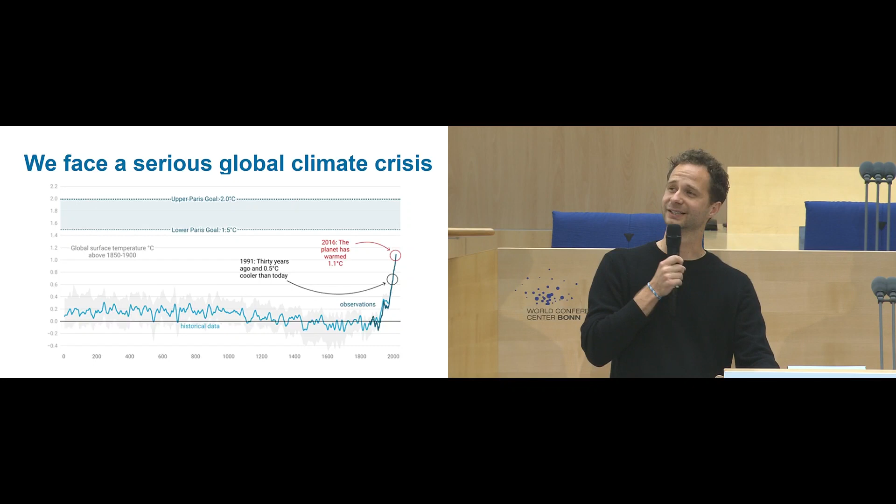So a picture from Spain on a hot day. Also in the Netherlands our perspectives change, because as you can see on the map, a part of the Netherlands is white because it got so hot that the normal rating system couldn't handle it anymore. So we're really in new times and we have to find new ways to design the city.

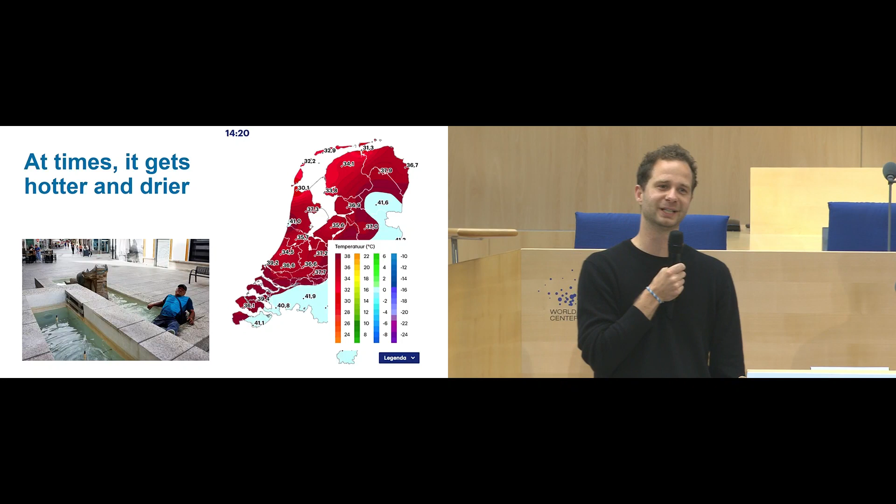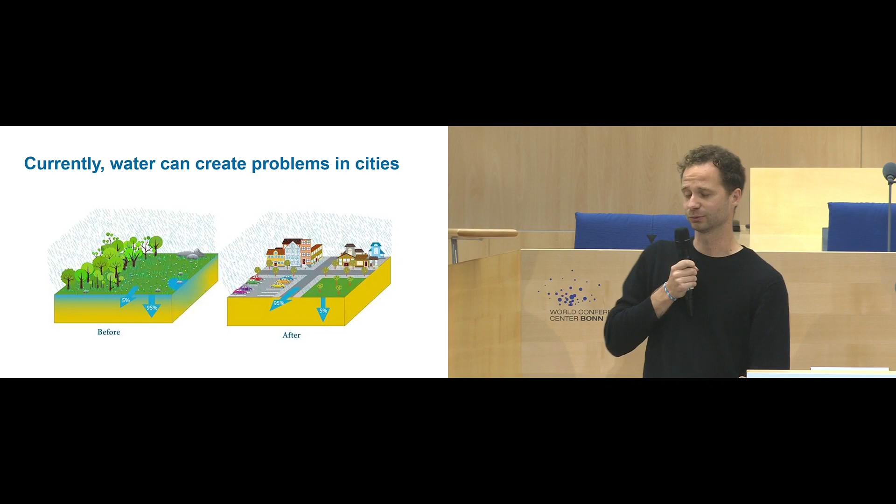Currently, especially in the cities we work in, water is a problem because there are a lot of hard, impermeable surfaces. So water runs through the city a lot, but the city doesn't really absorb the water, and because of that we have to deal with a lot of risks.

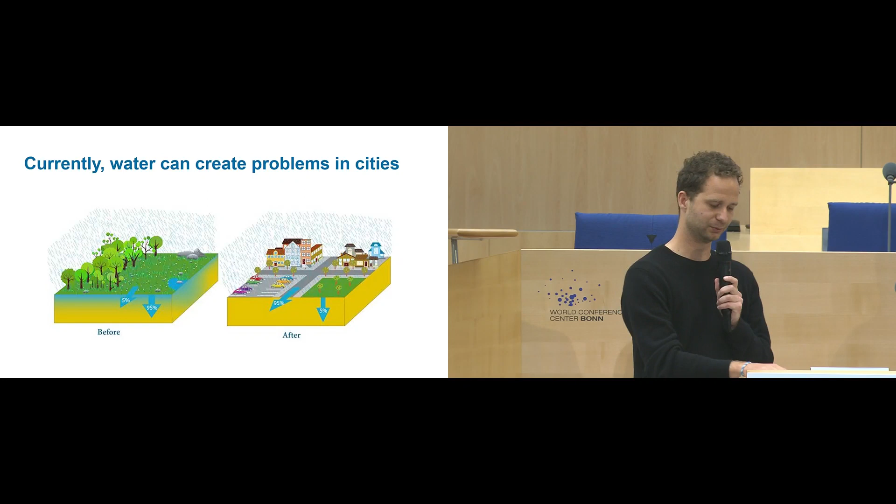So we already work together with water professionals who teach us about where the risks of flooding are. This is a project I did in another city in the Netherlands, where you can see that due to heavy rainfall, places start to get flooded. We analyze this and we can use it because we can create more spaces in our designs for water and for green, so it helps.

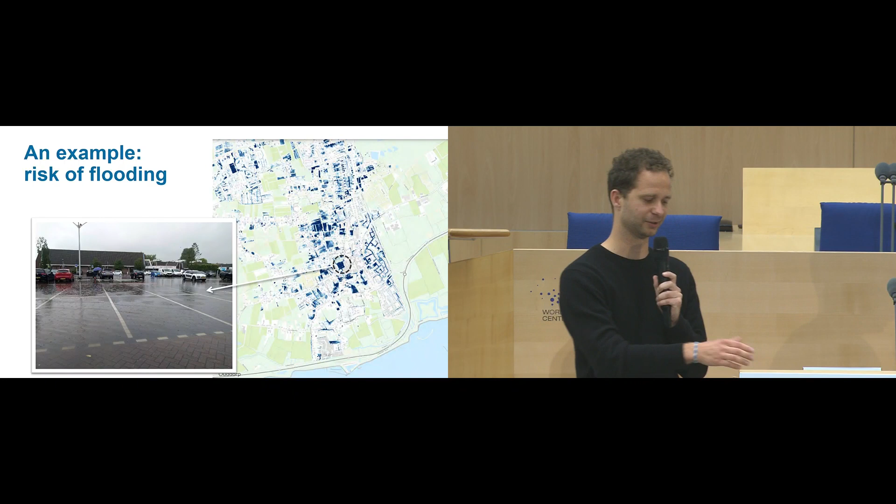But for now we see that at the same place, they knew this problem was happening, but they created another parking space, almost the same, and they just found a technical solution for it. So they thought, well, let's make the water run away quicker.

This is definitely a solution, but I think it shows how we as designers and water engineers don't always work together, because if we had involved each other or known more, maybe we would have gotten more green space as well. This is a big problem we as designers have, and you as water engineers have - we're probably used to seeing things in our own cubicle a little bit.

So I will take you through a little bit of the solutions we are working on. It's really an urban design perspective, not like the technical solutions we also hear a lot about, which is really nice as well. It focuses on the Netherlands and the temperate climate, because we are not working in Africa for example, but I hope the next speakers will address this a little more.

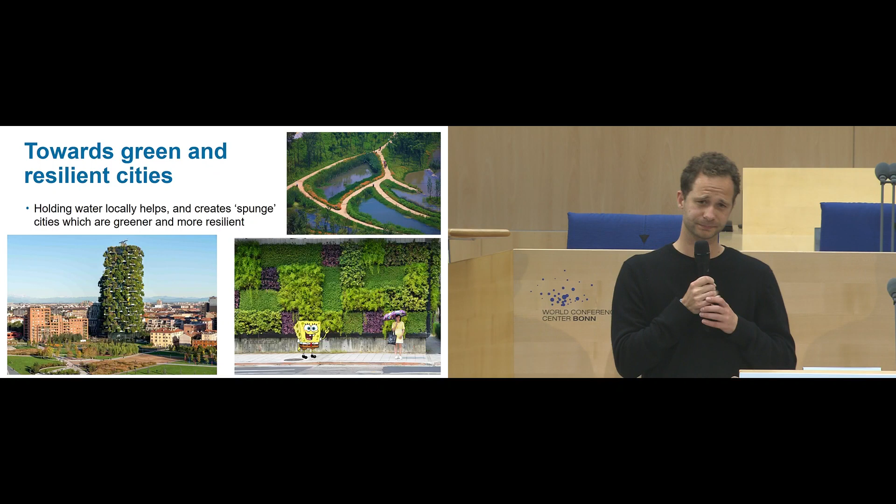So, towards green and resilient cities. When we look at the city, we really want to make sure it becomes more of a sponge city. So instead of creating all these hard surfaces, we want to absorb the water into the city, because it helps the city become more green and makes it much more resilient, and at the same time it gets more attractive as well.

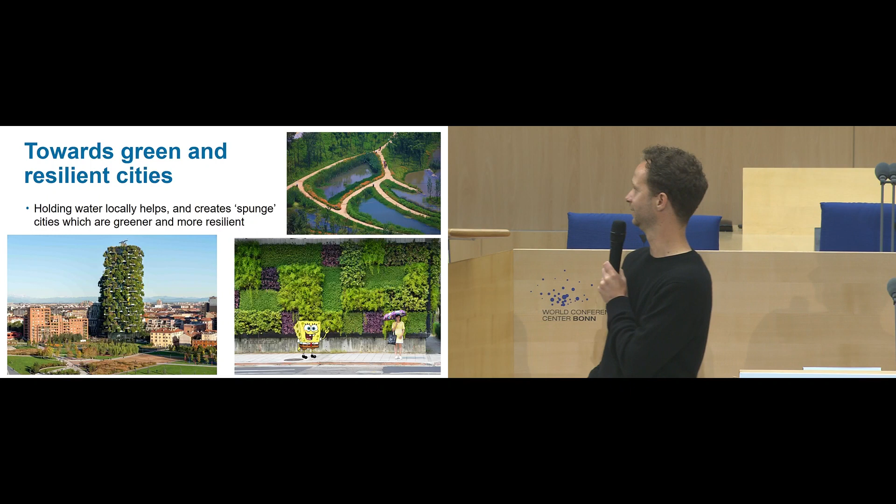So you can see a tower - we all know a lot of big towers in our own cities, but with all the green it immediately gets more attractive. Also green walls and a place for water really make the city more resilient and at the same time more attractive.

In our work, we really try to go from this gray infrastructure, these hard cities, to more soft cities, where also facades of buildings can be green and absorb water as well, which may help urban water managers address their problems, because water can be held more locally instead of flowing away in sewage. It also means providing a little less space for the car and hardened surfaces, but more for green and trees, which also help provide shade during the hotter days.

These kind of pictures are showing that it's really as much an attractive city as it's a more resilient city when you think about this green and blue infrastructure. Water can really help create better urban spaces.

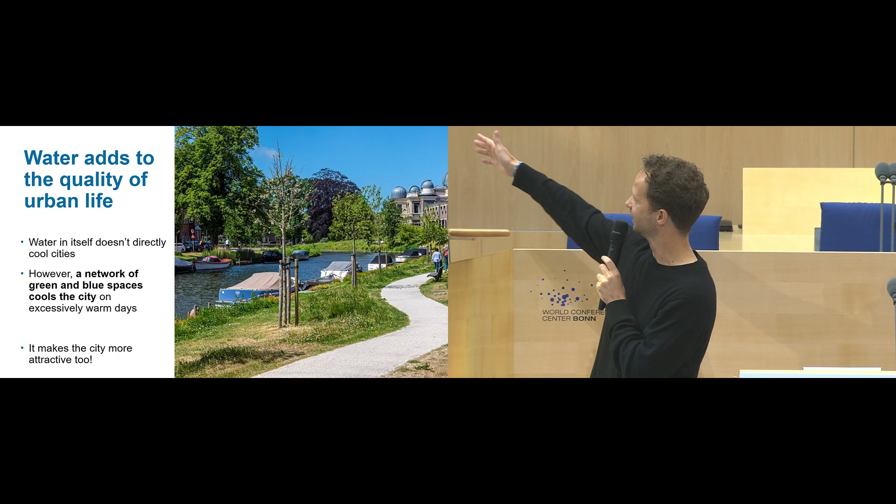As urban designers, we really try to focus on the existing green and blue networks and take them as a starting point for our design instead of just designing over them and starting over. It makes the city more attractive too, as you can just run or walk next to the water, or like in Paris, where people are bicycling next to the Seine. These kind of things are really a lot of positives to the city.

Apart from water and green, water can just be fun in itself. So as designers, we also like to play with water in the city because it can be fun. It can help kids enjoy their space in the city who don't have a garden for themselves, for example. And sometimes we need to find solutions also during heavier rain, but you can design them in a nice way as well.

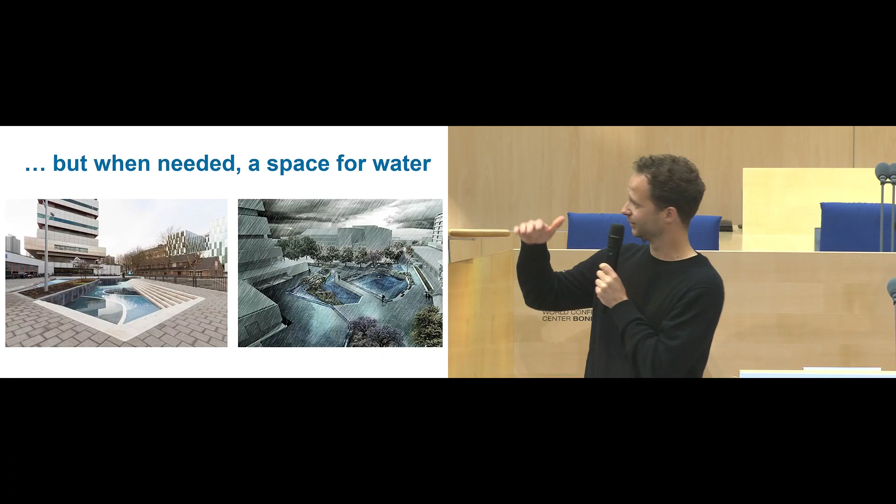So here you have a space - people love hanging out here. It's in Rotterdam, close to a university, so it's a real social space. But when it's needed, it's a reservoir for rainwater. It can fill all the way to the top, and it helps the city hold water and also helps the green places around this square to have their water.

So it's not only about finding technical solutions, but about talking together and seeing what the problem is, how we can solve it, and how we can design it together with the information we have to have a positive impact on the inhabitants. So in summary, water is crucial for building climate resilient cities.

We see this in our practice every day, and in a rapidly urbanizing world, cities are now sometimes part of the problem because of all the hardened surfaces and lack of green. But they can really be part of the solution when we try to build more towards green sponge cities, which absorb water locally, hold it, and make sure the city is cooler. The inhabitants are happier because they have a lot of green around, and it invites movement, so it's also a healthier city.

For that, teamwork is really needed. We need to talk together with each other. We have to make sure we are aware of the problems from water, and understand how the water flows, but also talk to academia who can find new solutions, and eventually the community. We try to make places for the people who live there, so we need to involve them as well, and then we can create more added value together instead of just solving problems separately.

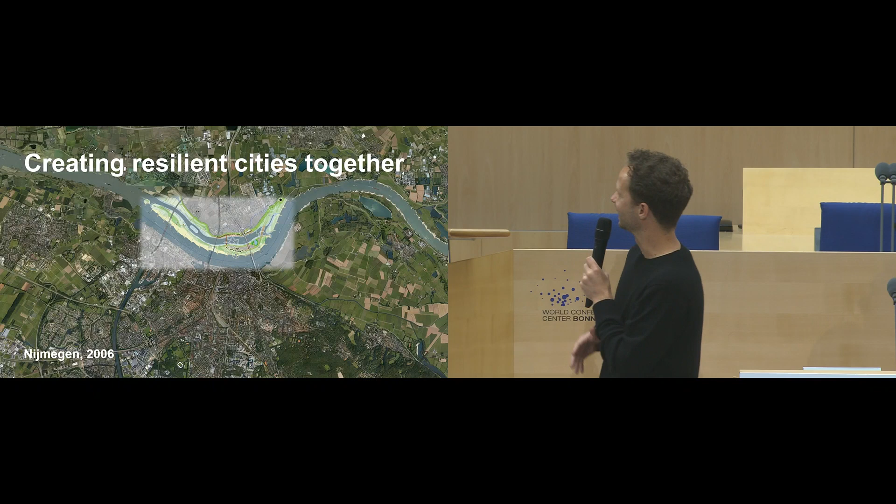They had to come up with a solution, and instead of just broadening the river or finding a solution so the river could handle more water, they started designing and talking to the communities as well, trying to solve it together. They came up with an idea to make a little extra river - we call it a mirror river in Nijmegen. It's an extra river to handle the flow of water during heavy rainfall.

But it also creates an island in the city, and on this island we designed a new place in the city. It's a green place, and people could talk together with the designers about what it should be.

Now we're in a situation where it's finished for a few years, and it shows it's really contributed a lot to the city. It made a greener city, a happier city, and a more resilient city, because it's also fine on heavy rainfall days when it overflows. It's designed that way, so it's fine that the paths overflow as well - they can handle that.

But when it's not overflowing, it's really a place where all the inhabitants of Nijmegen love it. It's become one of the most favorite places in the city. It's just a more fun city, and together with the technical solutions, the urban design solutions, and the local community, they really addressed the problem in a way that added way more value than we could have imagined before. Thank you, that's what I had to say.

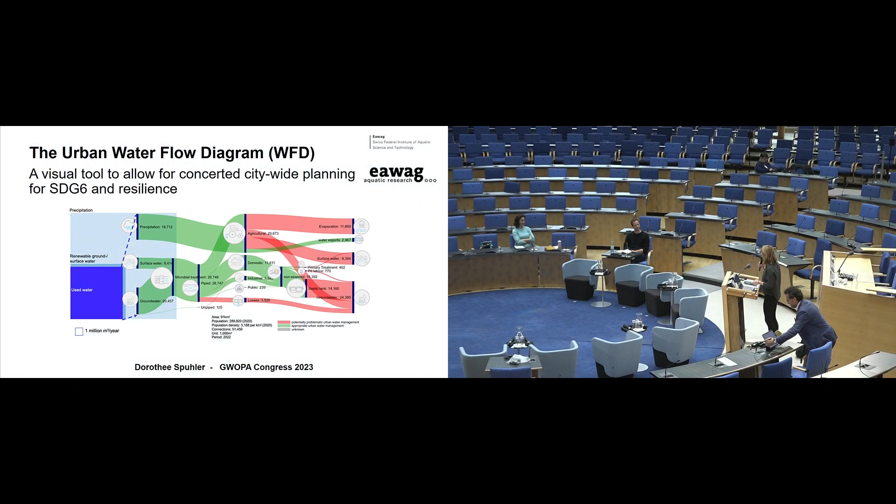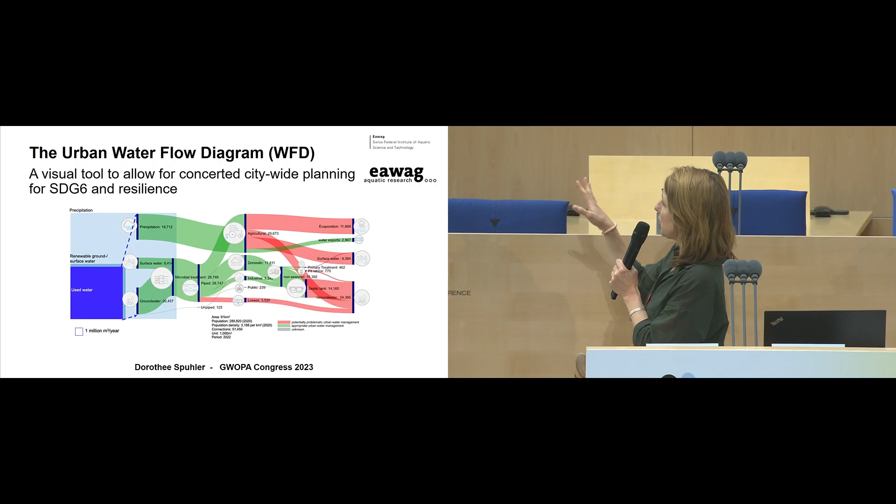Hello, thanks. Dorothee Spuhler. That's my presentation up there. I'm going to present the urban water flow diagram, a visual tool to allow for concerted citywide planning for SDG 6 and enhanced resilience. A big title, but before that, I would like to connect to the previous presenter, and I brought this picture here.

It's a little bit small, I know. I don't know if you can recognize what it is, but it's actually the Swiss dashboard for measuring corona in wastewater. Nothing to do with the water flow diagram, but I brought this picture because in Switzerland the story behind it is interesting. Like many other places, we ran into the pandemic with very little knowledge and a lot of directives from the government which were not well accepted because they were not well founded and not understood.

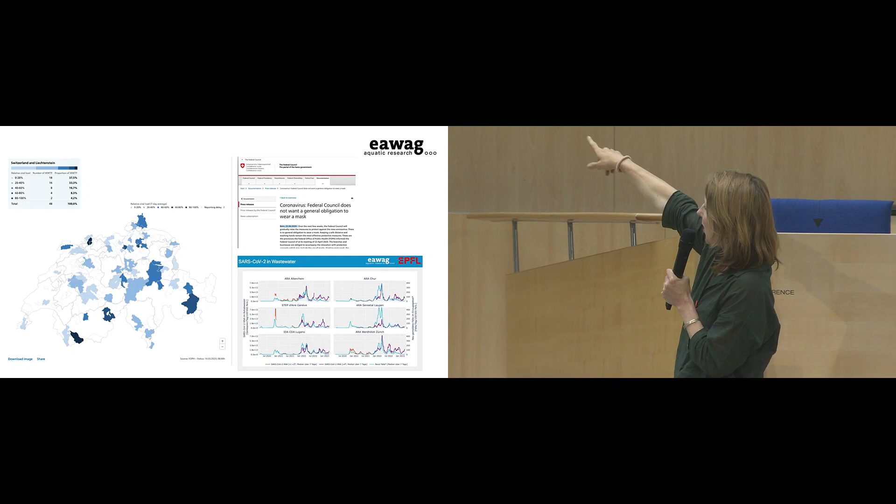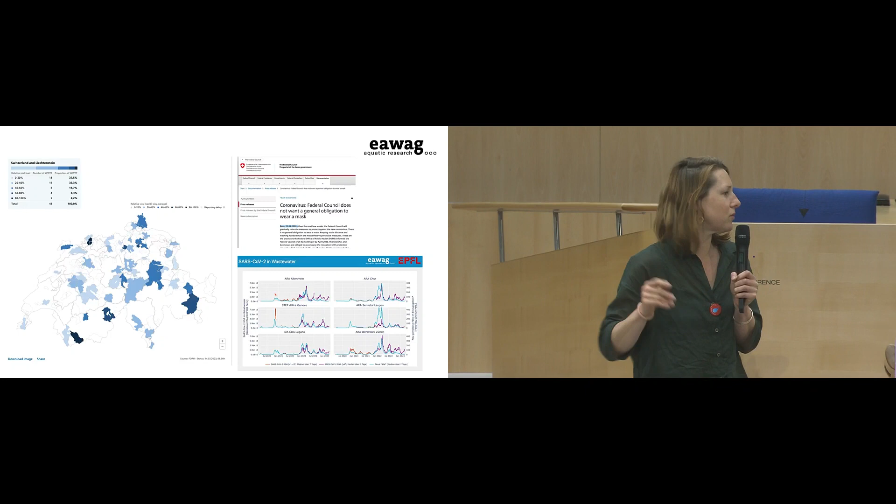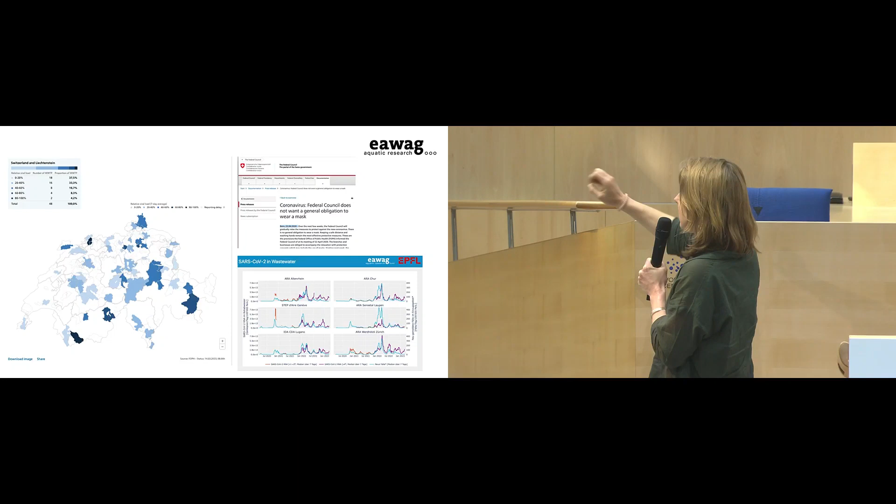And then later on, that's the Switzerland case on the left, and on the top right you have a headline where the Federal Council actually does not want a general obligation of masks. That's a typical example, because they said masks won't help and so on. But later on the private sector came in and measurement techniques and vaccines were developed, and nowadays we have this fully fledged online monitoring system in wastewater treatment plants.

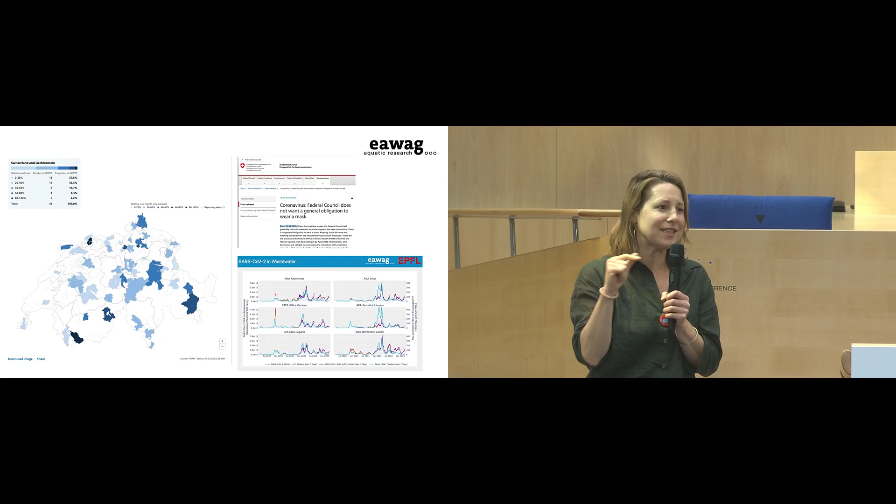I brought that example because I think it's a perfect example of teamwork. My colleagues at EAWAG developed that, but together with policymakers, the private sector, and civil society who at the end have to understand it. This teamwork example is actually the kind of thing we also try to enable with the water flow diagram.

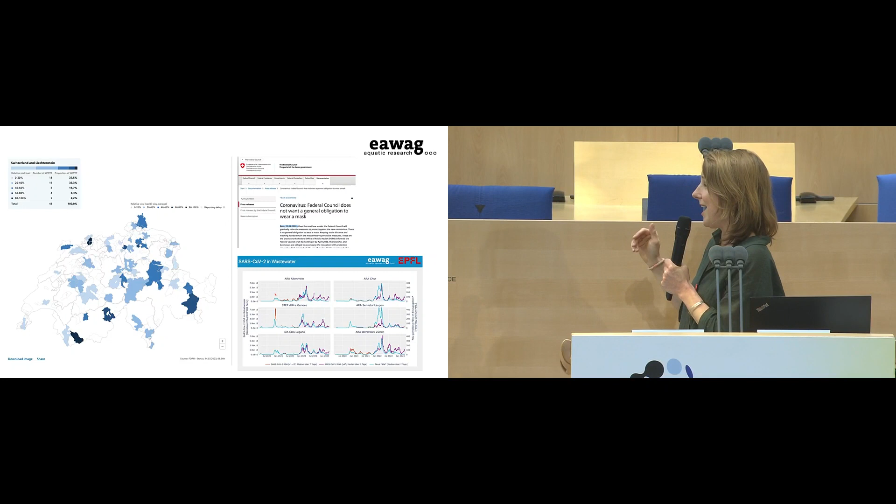So I'm a little bit the freak here. I'm an academic person, like you're a private sector person. It's the freak show, I don't know.

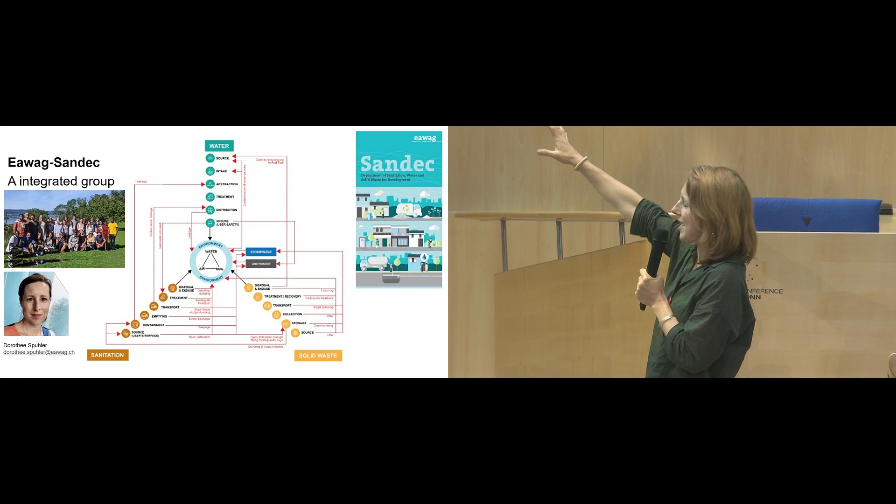Anyway, I'm from EAWAG, the Swiss Federal Institute of Aquatic Science and Technology, which has 12 departments, many disciplines, but all around water. I'm in one department called Sanitation, Solid Waste and Water. We are the only department that has an integrated approach, because we believe we have to look at sanitation, solid waste and water in an integrated way to use opportunities and jointly manage challenges.

So we're coming from an integrated approach, and we also work very transdisciplinary. We want to really engage in close collaboration with practice, policy, and civil society.

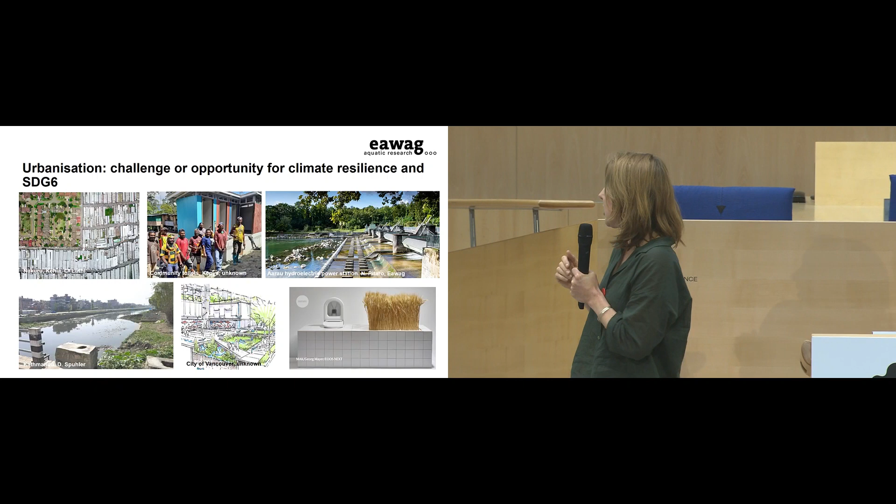In Switzerland, we have the chance... we also focus on urban areas, and urban areas bring a lot of challenges but also opportunities when it comes to SDG 6, many of which have already been mentioned yesterday evening by Carla, and now again by you. Challenges include pollution, inequalities, heavy rainfalls, floods. Opportunities include non-potable reuse of water, sponge cities, and so on.

In Switzerland, we have the chance to have a very active community of practice, where people from academia, science, policy, and practice all come together and regularly have an exchange. And for these people, this integrated approach is also relevant.

It was in a meeting in 2020 where we sat together and asked ourselves, well, can we develop a tool that enables different actors at the local level in our development cooperation projects to work closer together and have an integrated view at the city level, linking IWRM, the human right to water, sanitation, and so on. That was the initiation of the idea of this water flow diagram.

The idea was to have a tool that allows us to describe everything happening around water, to have an understanding between different actors and sectors, and then to jointly prioritize action. That was the idea behind it.

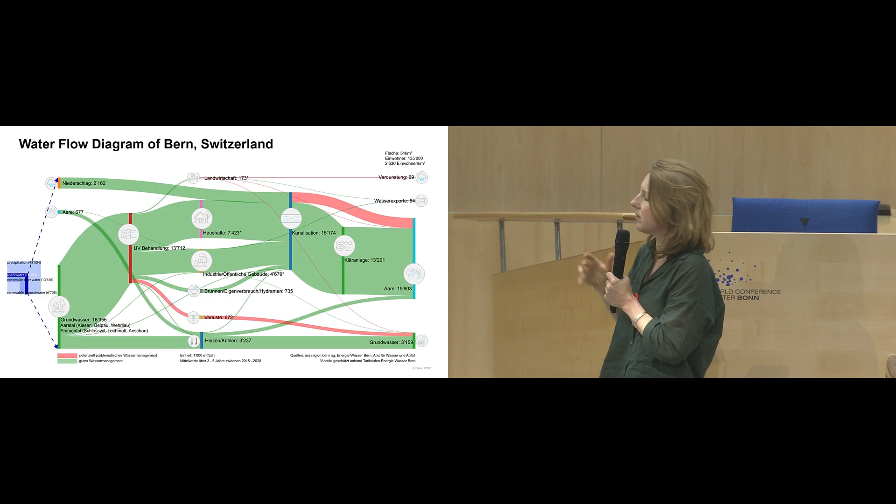The result is the water flow diagram, and here is our first case study. This is the city of Bern, capital of Switzerland. The water flow diagram has on the left hand these boxes - that's all the available water. Then you have a Sankey diagram which shows all the different sources, uses, treatment, uses, collection, and at the end, reuse or disposal.

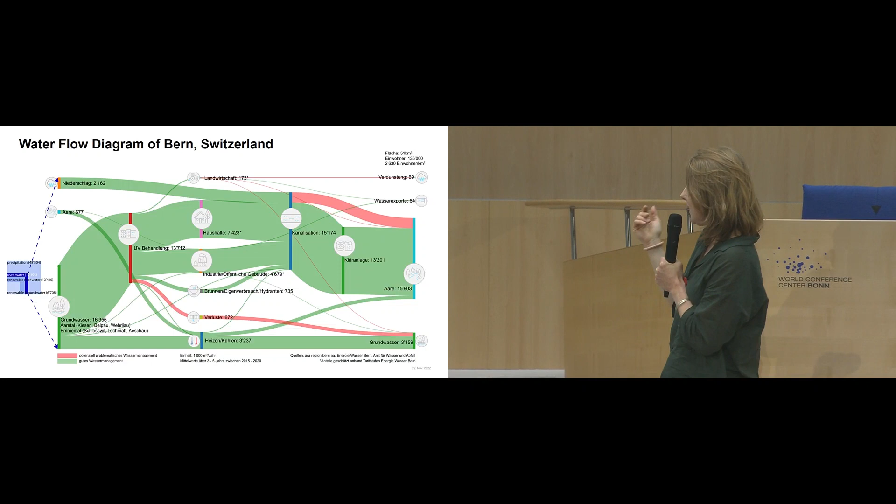What you see here also allows you to give a judgment on whether something is appropriate management or problematic management. In this water flow diagram for Switzerland, you would say everything should be green, we're fine, but there are two things that are interesting. First, the groundwater - that's the big box on the left - is actually imported from outside the city, and at the end goes back to the river.

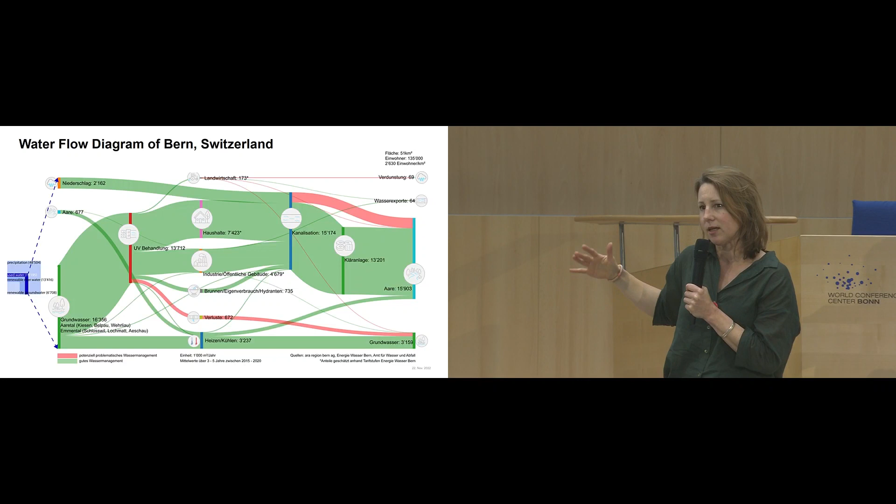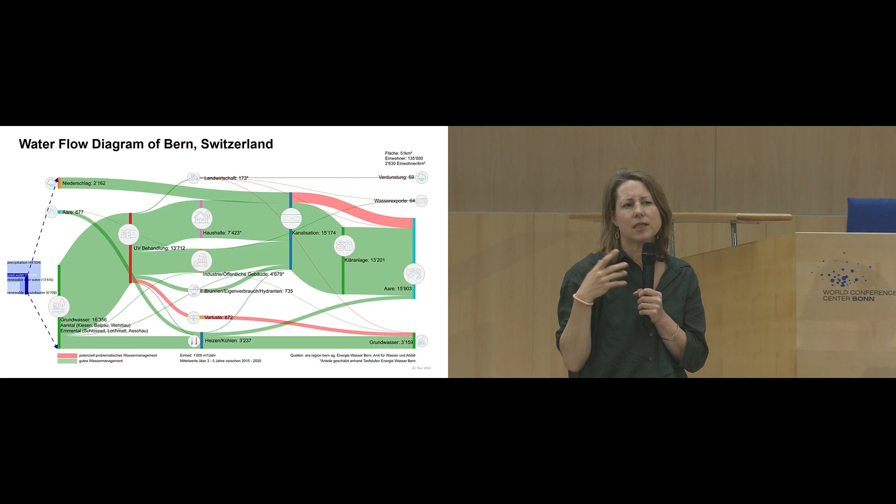So it's kind of a displacement of the water, and downstream there are many more cities, and the flooding risk is quite high there. The other problem is the red line up there in Bern - the combined sewer overflow. That's water that goes into the river untreated because of heavy rainfall. It's much higher than in general in Switzerland, about 8%. So what is next?

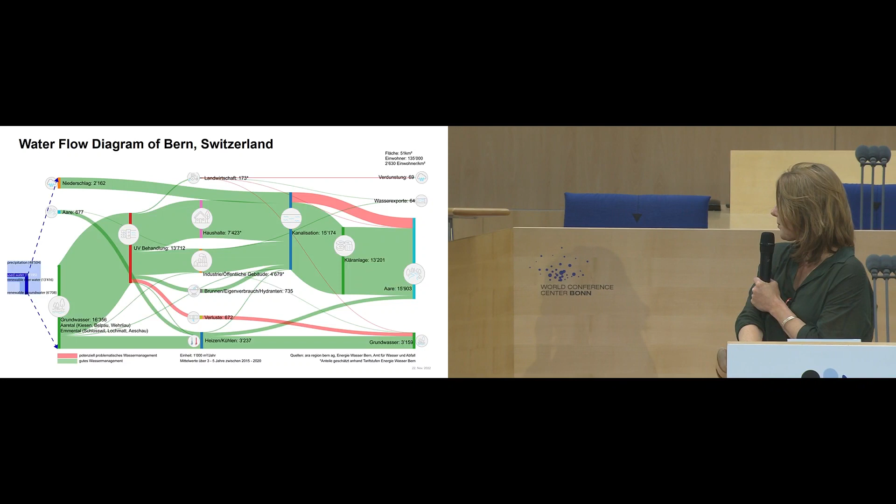Why did the city of Bern develop that with us? The city of Bern is actually a Blue Community. Blue Communities is a movement from Canada that has rolled out globally, and it's quite a vibrant community in Switzerland. The Blue Community is a self-declaration of a city or institution promoting water as a human right, supporting or investing in tap water instead of bottled water, and promoting water and sanitation as a public good.

I won't go into detail, but what's important is that in Bern we had a lot of data already. Still, it was a really rewarding activity for the city, because it was the first time that wastewater, water, and the different services put the data together in one picture, and they realized it's much easier to talk to political people and the general public with it. It triggered the city of Bern to start investing in blue-green infrastructure to address combined sewer overflow, and they continue to use this water flow diagram for annual reporting.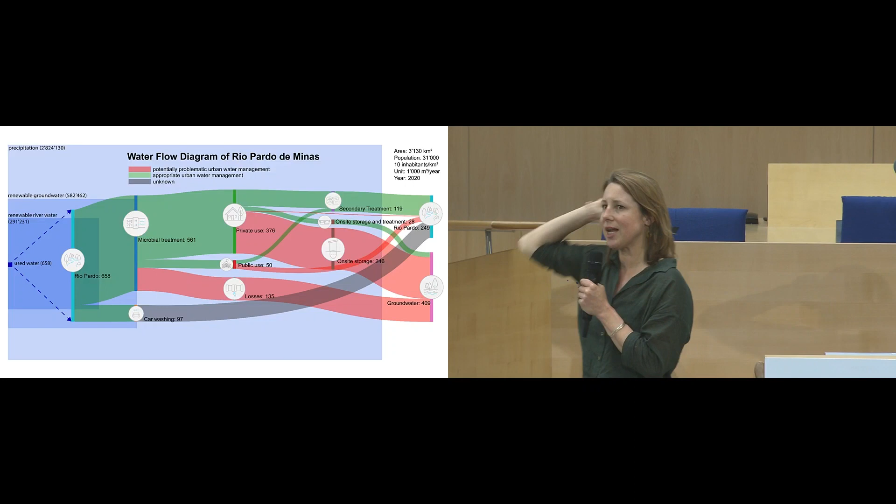In Rio Pardo de Minas, we had very little data. So we started with the first diagram only using assumptions, then held workshops where different actors came in. At the end, we ended up not only with this diagram for the city center, but realized that agroforestry and mining companies have an important stake in the whole water situation. Now we have another diagram which looks very different, showing a huge risk of overexploitation. This is only the data based on water rights, so even though the rights would be respected, there's a risk of water overuse in the future.

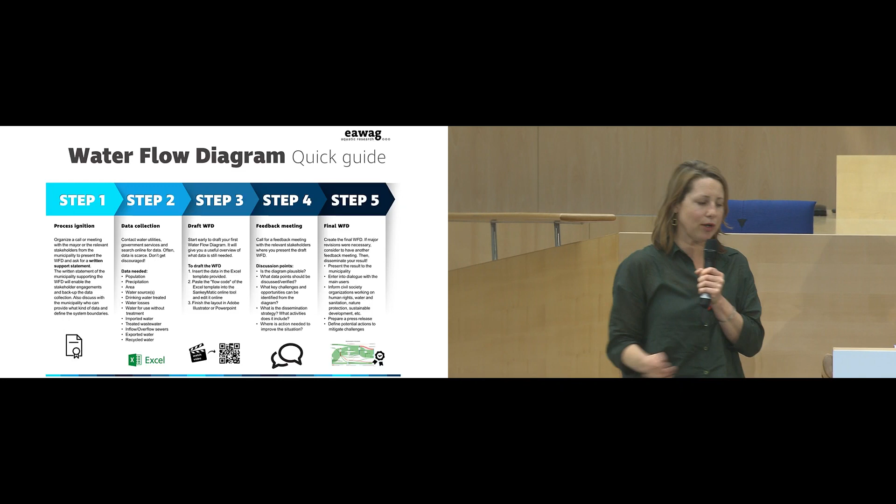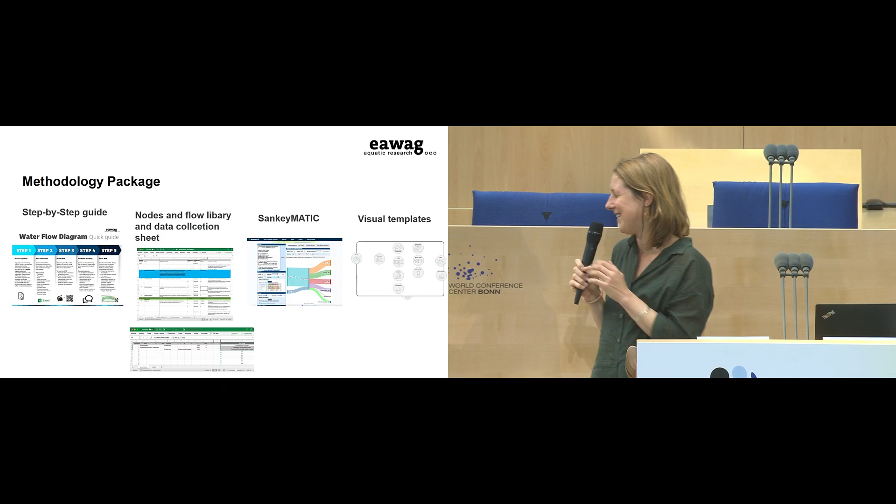So the process is important. It's not only about the diagram, but also the embedding in a participatory process, as we've seen in Brazil. To support this process, we developed a quick guide, available online, along with a few other resources. With that, within half a day, you can make some basic estimations. I'll try to talk fast to be in time. Make a first diagram and then start to discuss it with your stakeholders.

At the end, we developed a tool that intuitively and very compactly allows a city, utility, or organization to show different opportunities and challenges related to the SDGs, including inequalities or access to sanitation and water, pollution, reuse, and stakeholder collaboration. We developed that in 2020, which is when I started in this community of practice.

We presented the first case studies in Stockholm in 2021. We then went to Dakar with a standardized methodology. And now we have this methodology online, it's free, and we support cities around the world to apply this tool in their future projects. That's also a little bit why I'm here.

In Switzerland, we started to promote it as part of city partnerships, not only Blue Community partnerships like Bern and Rio Pardo, but also city-to-city partnerships. We have two of them, presented yesterday: Lausanne-Nouakchott and Lugano-Hawassa. Within these partnerships, we believe this visual representation can enrich them and support the exchange. With this, I would encourage different organizations to use it and join us to help further develop this tool.

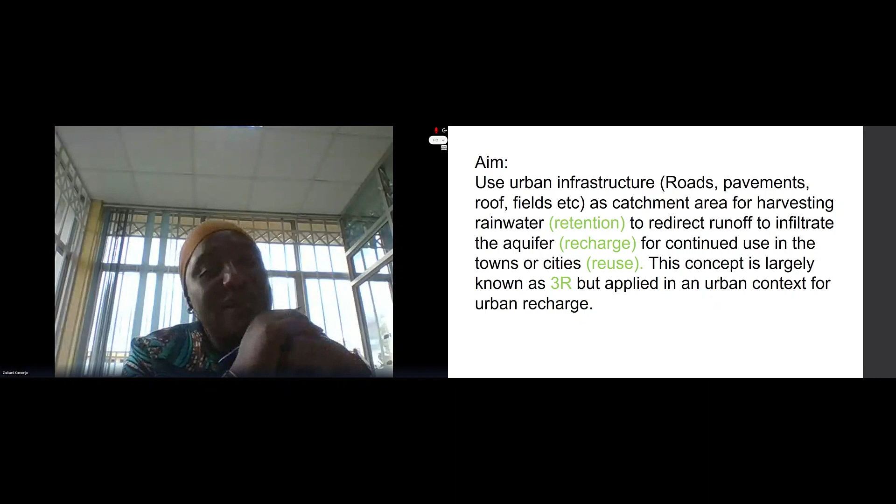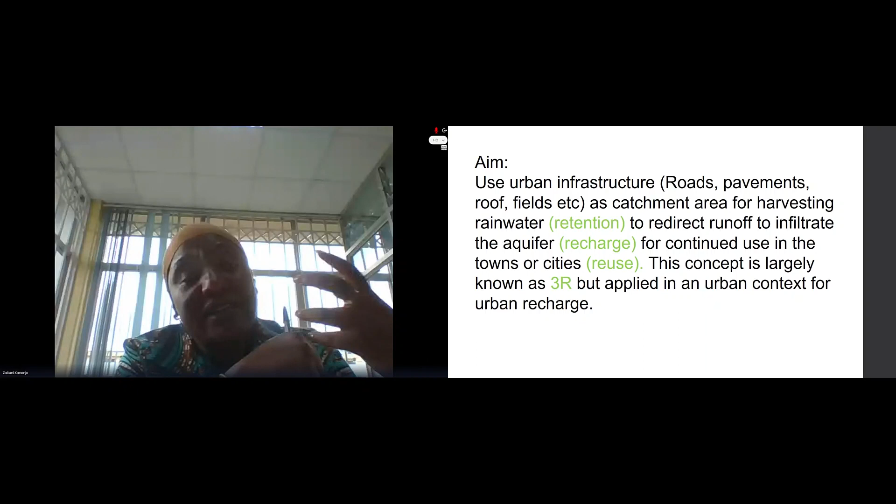Our aim is to use the urban infrastructure, that is the roads, pavements, roofs, and fields, as a catchment area for harvesting water, so that we are able to retain the water and redirect runoff to infiltrate the aquifer, for recharge and continued use in the city. This concept is largely based on the 3 Rs, because as a city our population is really growing while our production is really low, meaning we are not able to serve almost half of the population of the city.

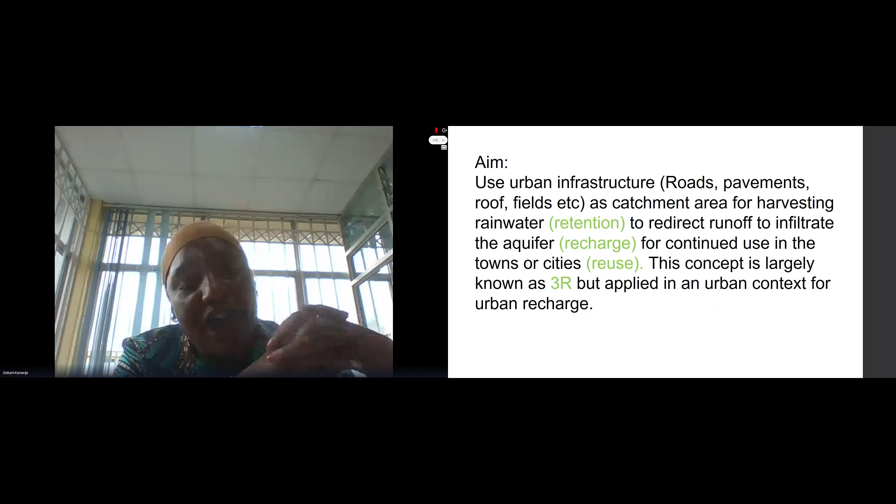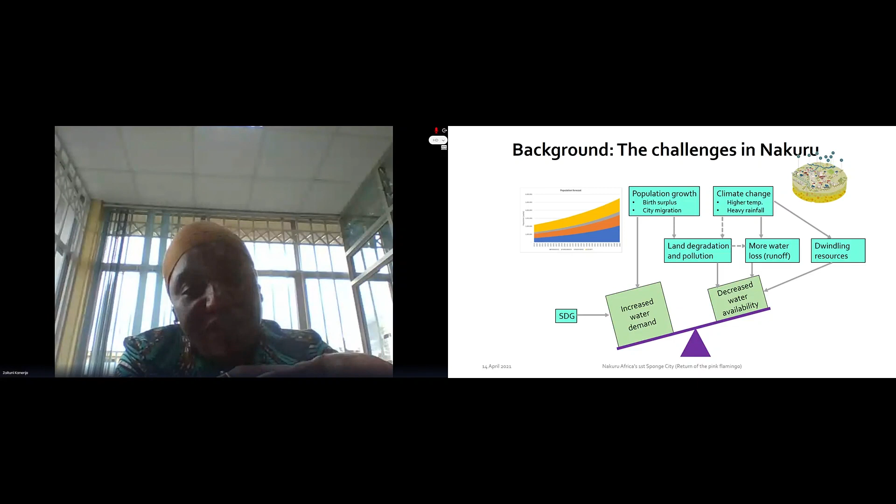Some of the challenges we have regarding water supply as a water company include population growth, of course birth surplus, city migrations of people moving into the city, and climate change, that is high temperatures and heavy rainfalls, which lead to land degradation and more water loss through runoff, which is dwindling the resources. At the end, we have decreased water availability to serve the demand, and with that we are not able to reach our SDGs, because as a water utility our aim is to serve people within our area of service, and if we cannot conserve the resources we have, we are not able to reach the sustainable development goals.

So for that, what are we looking at? We are looking at ways we can have additional alternative resources for water provision and regulations. We are looking at green infrastructure to improve water recharge and filtration, and integration of water management and urban planning. Since without proper coordination from the county and national government, we are not able to work this out. So as a water company, we are taking the lead to bring together different departments, so that we can have regulations towards climate conservation.

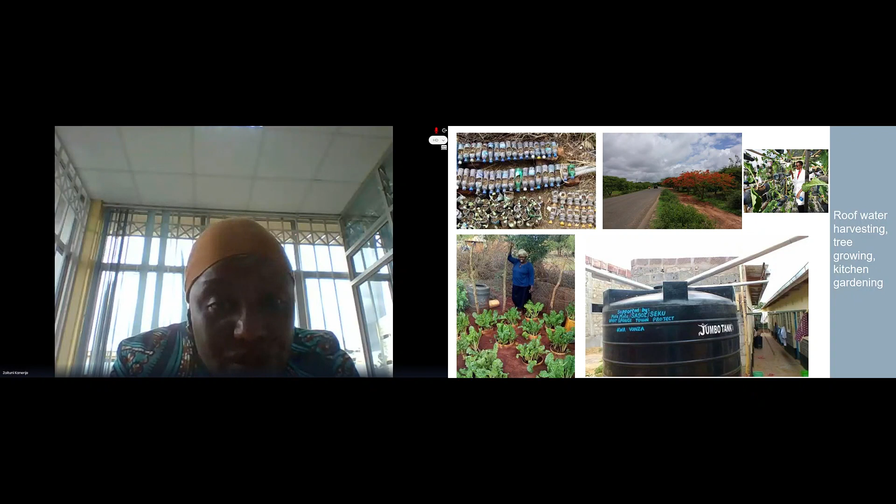We are also promoting harvesting. As you can see, that is one of the houses at household level, and this being an urban setup, most of the households are rental houses. We engage the plot owners to make sure they put gutters, so that even if the utility is not able to provide them with piped water, they can harvest rainwater and use the same water for planting.

Vegetables and all that. With this concept, we are promoting tree planting initiatives in the cities, both at schools and mainly engaging school-going kids, primarily primary school children, who can carry the same exercise even when they go back home.

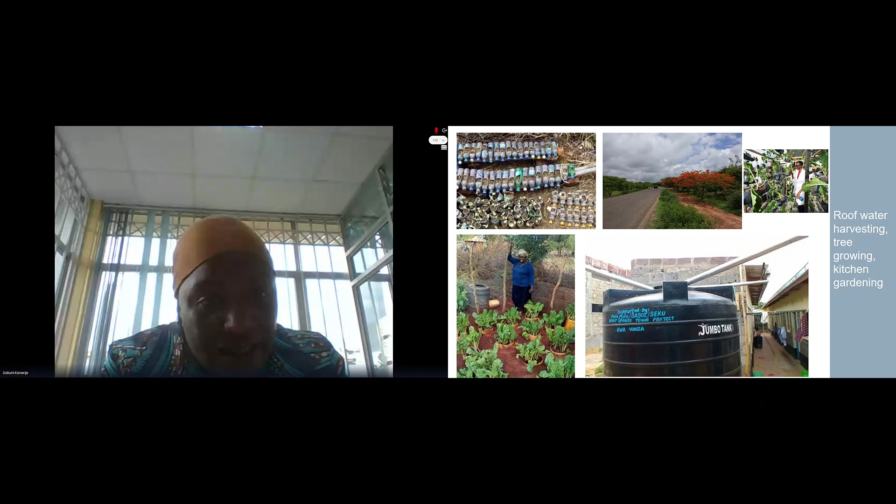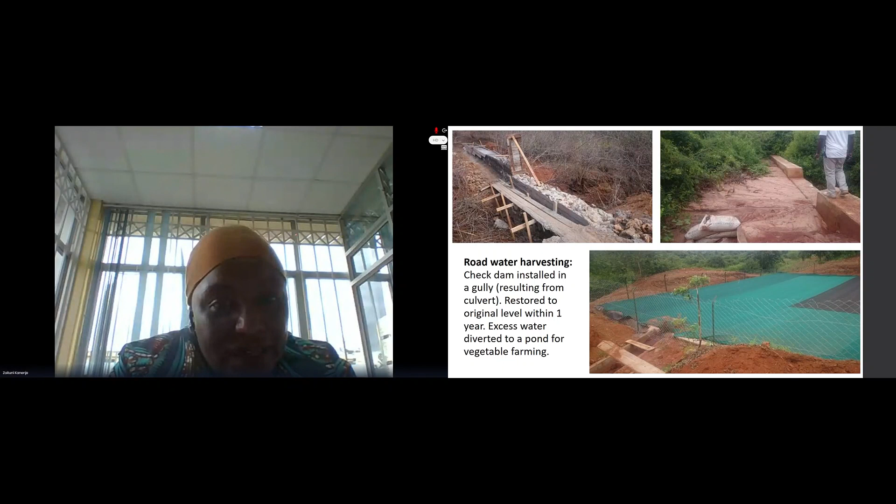Next, and next slide. Next slide, please.

After that, we engage them in demonstrations on how best they can harvest water and form community groups or income-generating activities, so that after growing vegetables, they can sell them and earn money, instead of depending only on the utility to provide water, which, for Nakuru Water, is mainly groundwater, and it is not enough to serve our city.

So basically, the approach is engaging the public, engaging the municipality, engaging all the departments within the county, to ensure that when we talk about climate change and conserving the environment, it is our responsibility as a whole, not only for the water service providers. Yeah, thank you.

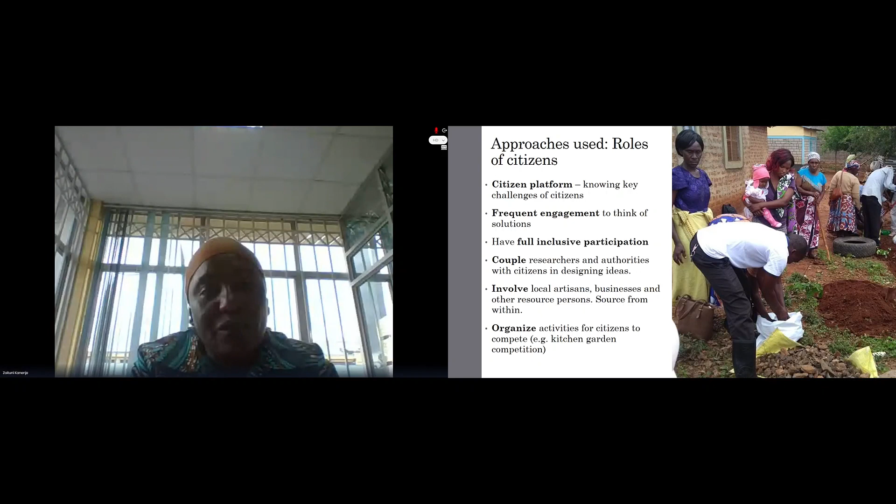That is now, as I mentioned, about the frequent engagement of the public, having inclusive participation where everyone should be responsible. Community participation is really important. Then also engaging the locals, local artisans, and small businesses, when it comes to the water you are able to conserve, figuring out what you can do with it and how best we can utilize whatever we have. Thank you, and that is the end of my presentation.

Thank you very much, Zeytuni. Please stay with us, we might have some questions for you. Thanks a lot for taking us through the practical example. I know this practice has been going on, supported by VEI for quite some time now, so congratulations on the good work. It's important to underline the water harvesting and reusing for growing food, planting more trees, and making sure communities are part and parcel of this process, bringing people at the center of resilience building in your city. Thanks again for your contribution.

With that, I'd like to hand over to Pinar Chaglin. She's working with the UN Habitat headquarters, planning, finance and economy section. Pinar is going to tell us about the work UN Habitat is doing, some of which relates to this discussion we had, and also how planning can help utilities think about things, related a little to Dorothy's presentation, to bring an integrated approach into perspective, and help utilities understand their infrastructure needs and investment. So I'll leave it to you here.

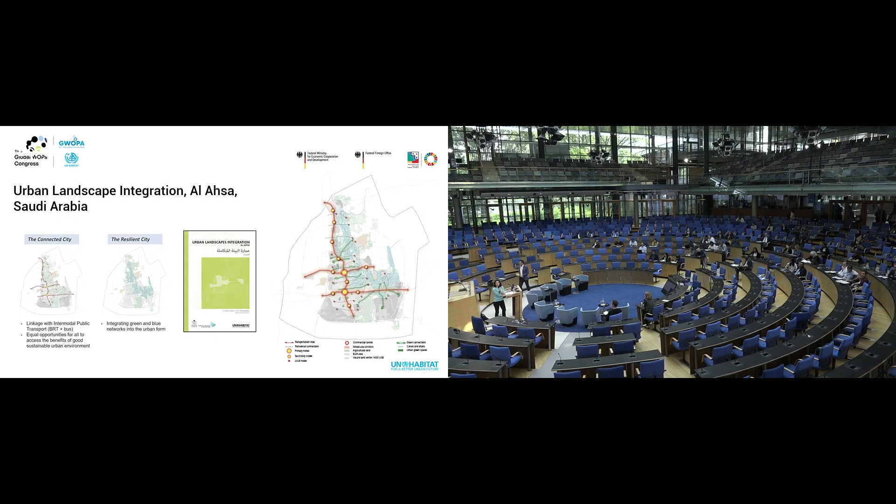Another example is from Saudi Arabia, a city called Al-Ahsa, showing how the blue and green network can be integrated into city-wide strategies, enhancing the resilient city and connected city objectives, and how these can be interlinked with development zones and transport corridors of the city, with more layers integrated into urban planning together with blue and green infrastructure.

What I want to highlight is what we are trying to do in UN Habitat, in our section, our team: moving from a more siloed approach to an integrated planning approach. Instead of sectoral plans, we look through a holistic perspective and combine all these layers to come to a more complementary, comprehensive result.

So what integrated planning means for us is sector integration, but also integrating different scales together: regional, metropolitan, city, and neighborhood scales, not just in terms of physical planning, but integrating physical planning with legislation and the economy.

When we come to implementation, this is the real challenge for cities, and how we can help cities and governments implement these planning decisions. So we are trying to develop tools and new methodologies to facilitate implementation, and I'd like to go into the service provision side.

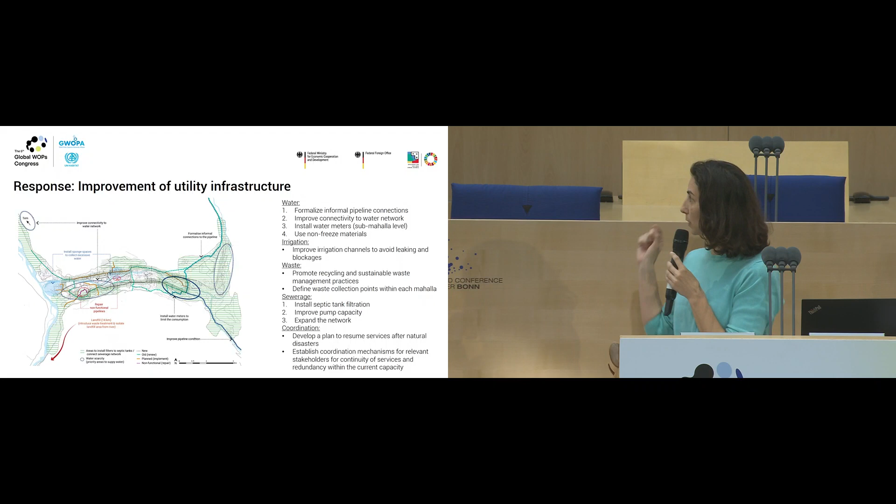And then we develop these responses, as I said before, showing exactly where you can improve your utility infrastructure for water, irrigation, and solid waste service systems, and what kind of coordination and collaboration is needed for that.

Then you create an integrated strategic plan for a city, and you need to translate all these colors, points, and lines into a project. You create a list of projects, and then you create the multi-criteria assessments based on your spatial plan. You run this assessment and get the prioritization of the projects, so you know exactly where, this year, in 3 years, in 5 years, what kind of investment you can make depending on your budget. So you fit all these projects into your annual budget.

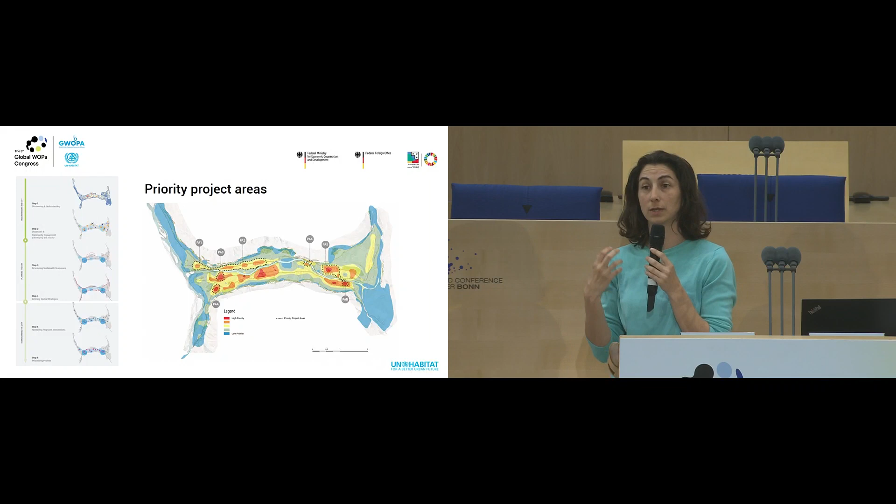This is a bit of a repetition of the process we follow, but you need to have a strategic plan, translate it into actions, prioritize them, fit it into your budget, and create an area-based development program for the cities.